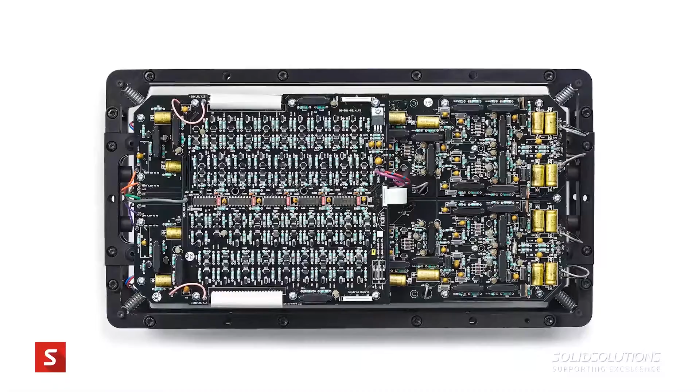Each amp and each preamp is hand built here in Salisbury. Each product has many bespoke parts to us which are handcrafted. So our products have a classic design. Many products come back to us after 30-40 years out in the field, and we're still servicing them now. It's great to see because obviously our customers are passionate about their units and about their products, and they love them.

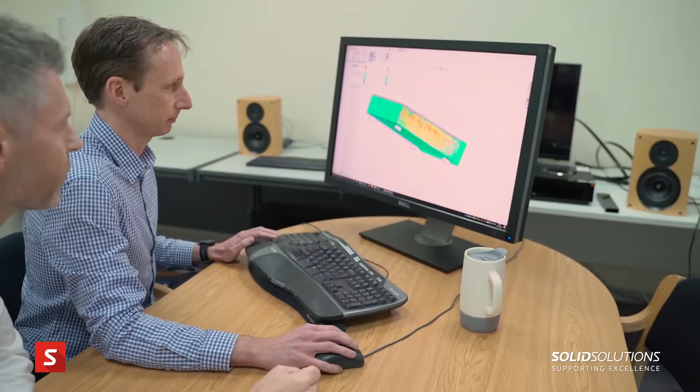When I first joined in 2001, we were using Creo. It was a great package to use, but it was very complex for what we needed. And we made a change in about 2007 to SolidWorks. We found SolidWorks a lot more user-friendly. The packages available for us were great, and they suited what we needed in terms of our needs and development at that time.

One of the main reasons for using SolidWorks was its flexibility and its usability. It was a lot less cumbersome than Creo, and we found that we could quickly change our designs and evolve products much quicker using SolidWorks.

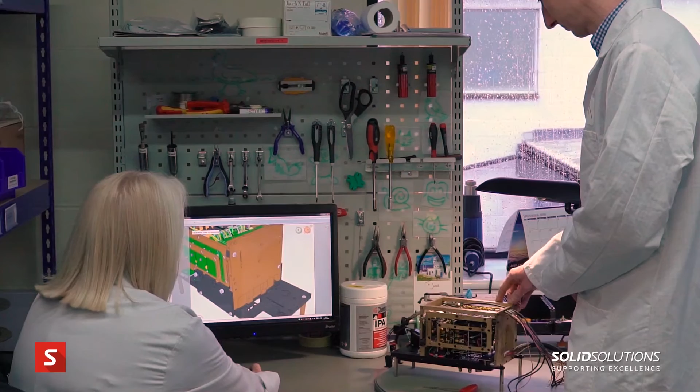So when designing our products, we obviously have key assembly times, and how products are assembled. We also employ SolidWorks Composer here. This is a great tool that we've really implemented since our Statement launch. This allows us to make design changes in CAD, which then are reflected in process instruction sheets directly onto the shop floor. Now, that can lead to better products because there's less ambiguity about changes, and anything that we roll out in a change in CAD is almost immediately reflected in a process instruction sheet change.

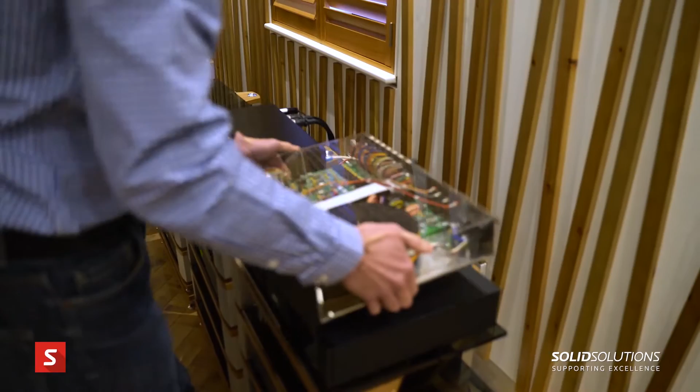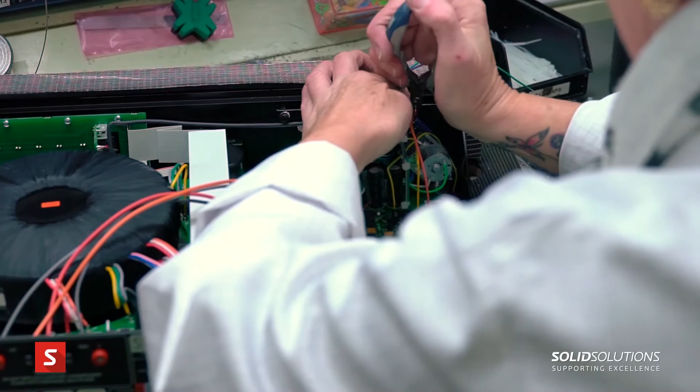So one of the great challenges that we face is obviously trying to fit everything inside a box. We have a finite space, and a lot of our components are rather large. We have large transformers because we believe transformers have great sound quality. So fitting large transformers in small boxes is a difficult challenge for us. So communication is vitally important to us. Communication between the mechanical team, the electrical team, and the production engineering team.

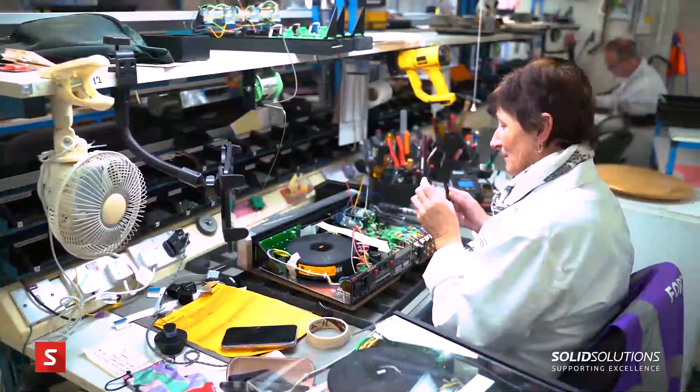SolidWorks allows us to do this in a variety of ways by direct feedback from the electronics team in terms of imported PCBs, the mechanical team, whether we can actually fit the PCBs into the space required, and also we can then show our production engineering team our design intent, and they can give us feedback on whether this is the best method for assembly and service.

SolidWorks is a great help because it also allows people who are non-SolidWorks based to view our designs and comment on our designs, so we can export complete assemblies to eDrawings, so our purchasing department can understand the components that are going to be needed in the development, and also anyone else in marketing can have an idea of the form factor of the box and what it's going to look like. So SolidWorks is a great tool across the company that we can employ.

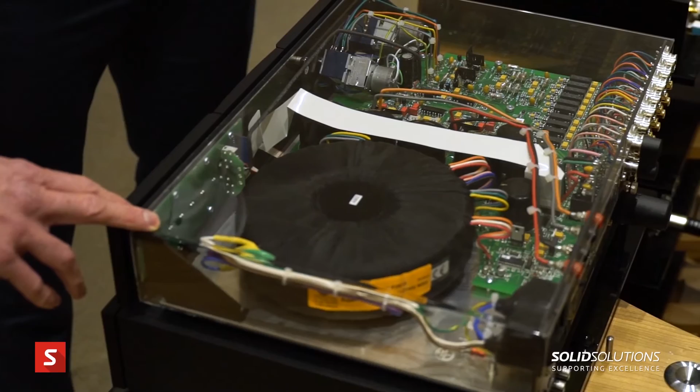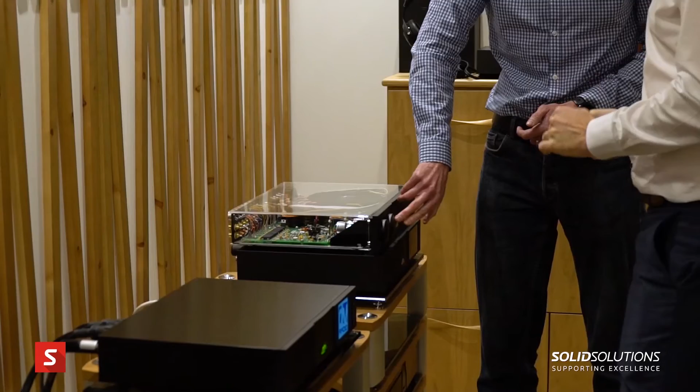So SolidWorks allows us to save time in a variety of ways. If we update designs, the design is reflected in the process instruction sheets almost immediately. Our drawings are also updated into our PDM system, which then has visibility to our QA team and also our purchasing team. So making a small design change would normally take a long time to filter throughout the rest of the company. But now, using SolidWorks, we can make a design change, and within a matter of days, the company knows our design intent.

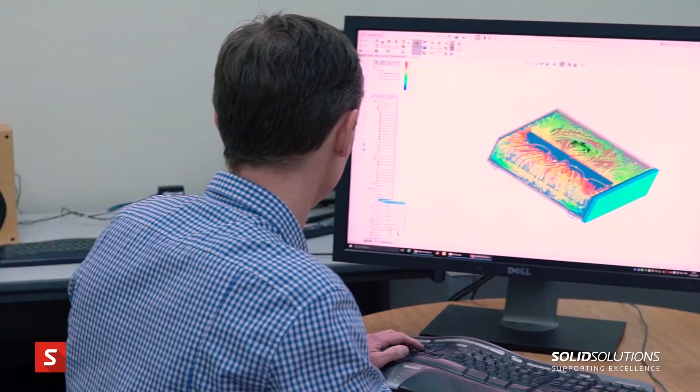So we use flow simulation in a variety of ways to validate our designs before we even design a prototype. This is increasingly important to us because timescales of projects have been squeezed. So designing a physical prototype and it not passing a safety test is a costly mistake. So using flow simulation software, we can validate designs, we can change designs very quickly, and we can give direct feedback to the electronics guys of features that we would like to change within the design that hopefully will make sure that we pass our safety tests.

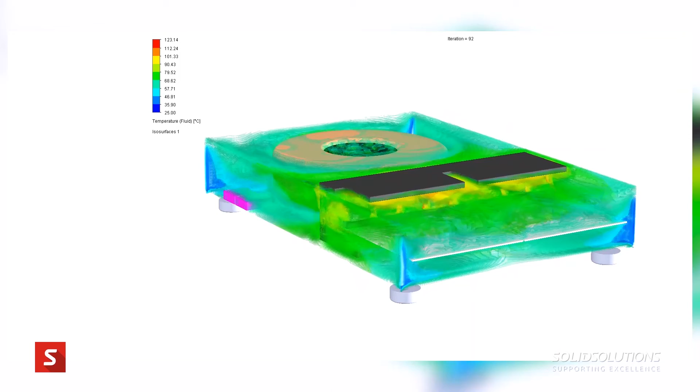For example, on the Statement amp, one of the key design features is getting rid of the heat. It's a massive amp, a very powerful amp, and heat management is very important within that. And also, obviously, the sound quality. If fans are turned on inside the product, it can be detrimental to the sound quality. So managing the heat in a product like the Statement amp is vitally important. So using flow simulation allowed us to design the best possible product using natural convection.